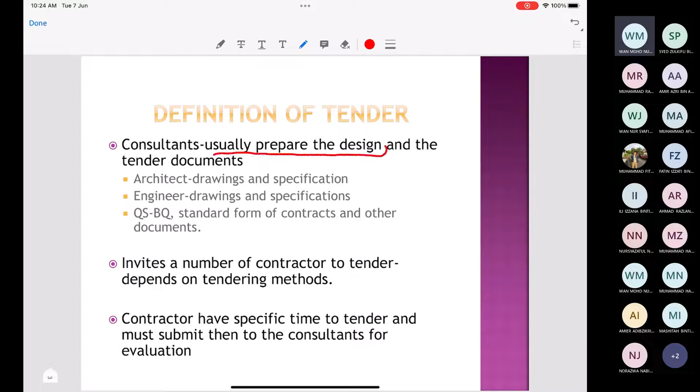So what else do we have here? Consultants usually prepare the design and the tender document. This is in the context of the traditional procurement system, where the design and also the tender document is prepared by the consultants.

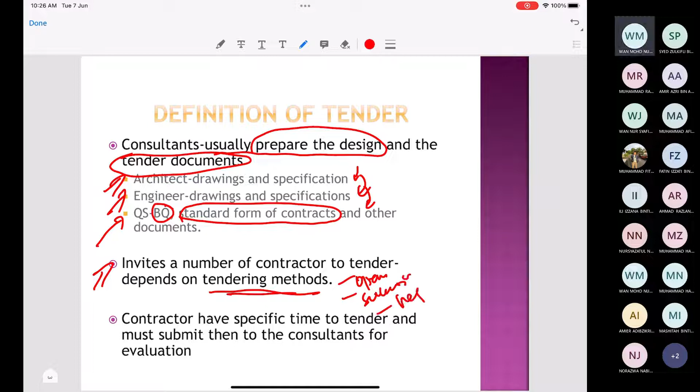If it's open tendering, it is open to public. It is open to any contractor that is interested to participate and can participate in the tender.

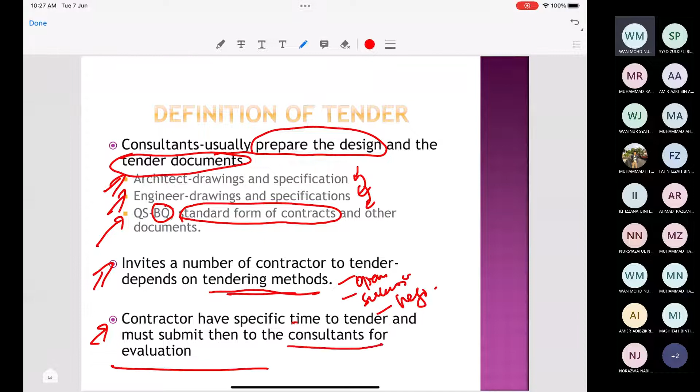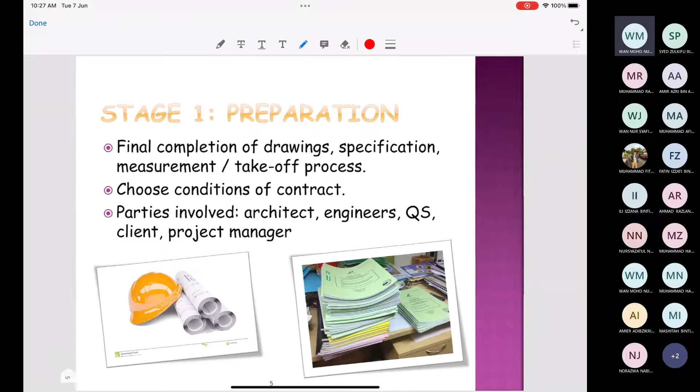I will discuss it here. So we have preparation, approval to tender, documentation, then it goes to invitation, processing, and award of the contract. Preparation is actually preparing the tender document.

Preparing tender document, we have the architect, engineers, QS, client, and project manager all come together.

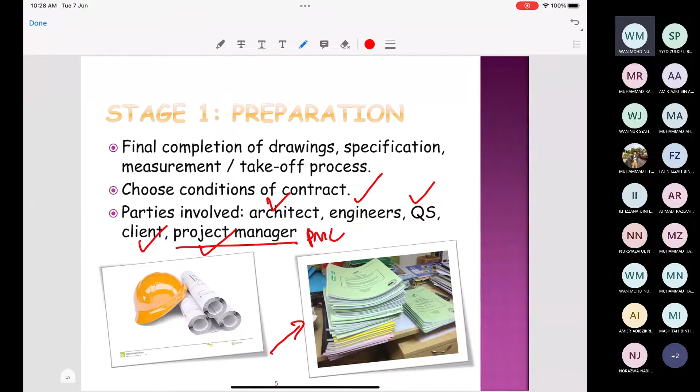So also choose the condition of contract. This is stage 1, preparation.

Stage 2 is approval to tender. So this is approval from whom? Who will give the approval?

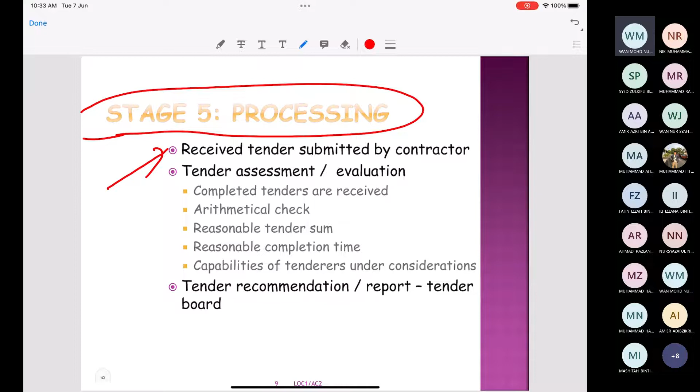Tender assessment, ataupun tender evaluation. After kita dapat tender document daripada contractor ataupun daripada tenderer, tender document tersebut akan melalui proses penilaian tender. Siapa yang akan buat proses penilaian tender adalah those consultant lah, lebih kepada QS kat sini. So apa kerja-kerja yang akan dibuat di sini, apa yang kita akan go through dalam tender document tersebut.

Kita akan tengok dari segi completed tender are received, maksudnya dari segi kecukupan, kesempurnaan tender. Kita akan check dari segi arithmetical check, maksudnya mathematical, whether the tender document ada banyak error ataupun tidak, mungkin silap dari segi timesing, squaring, dari segi calculation. Katakanlah ada terlampau banyak error, which means that this contractor are less capable of doing the job, kita cakap not that competent lah.

And reasonable tender sum - tender sum, it should be reasonable. Kalau projek tu around 50 million, it should be around that, mungkin 40 ataupun 60, jangan sampai 100. It should be reasonable. Reasonable completion time, in terms of dia punya construction period offered. Tempoh siap yang ditawarkan oleh kontraktor ataupun tender should be reasonable, munasabah.

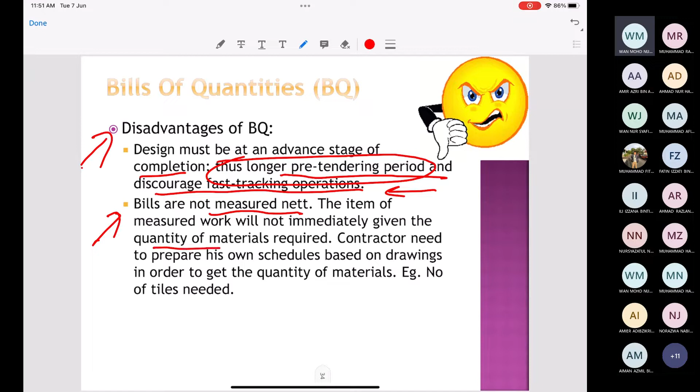The measurement is done according to the scope of work. The items of measured work will not immediately give the quantity of materials required. The contractor needs to prepare his own schedule based on drawings in order to get the quantity of materials.

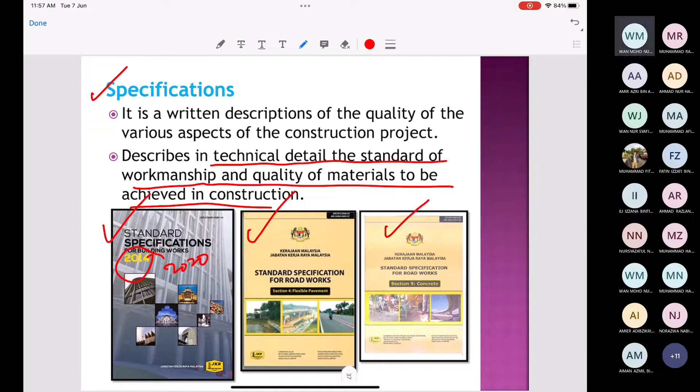Tapi katakanlah item tersebut tiada di dalam standard specification seperti ini, and that specification boleh kita dapatkan daripada manufacturer. So manufacturer punya specification boleh di-include di dalam specification dalam tender document tersebut.

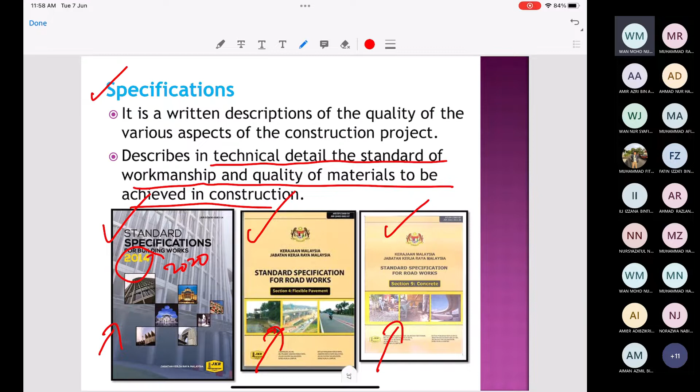Sebab dalam BQ, katakanlah BQ cakap tulis ceramic tiles, 'ceramic tiles or other equivalent spec' ataupun equivalent quality of the tiles. Maksudnya equivalent tu membenarkan kontraktor untuk propose tiles yang lain-lain, okay, yang bersamaan kualitinya.

Okay, saya nak terus ke preambles. Apa yang dimaksudkan preambles dalam ni? It's a preparatory document to explain the purpose and the function, underlying facts to inform contractor on what items is about and what needs to be included and considered during pricing. Semasa nak pricing tu, apa yang perlu dinyatakan dan dimasukkan sekali dalam pricing tersebut. Includes parties, supporting needs, objective and so on. And it is a non-price item, hanyalah on the explanation.

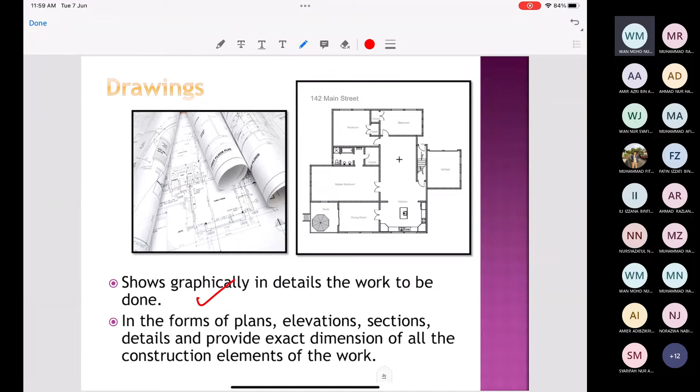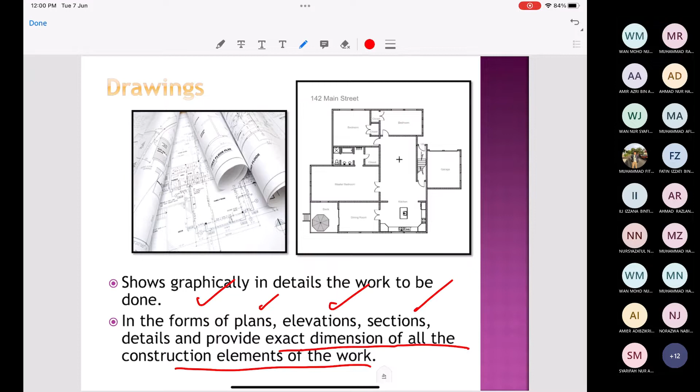Okay, boleh tengok preambles. Then we have drawings. Tahulah drawing ni apa? All of this shows graphically in detail the work to be done in the form of plans, elevation, section, detail, provide exact dimension of all construction elements of the work. Dengan adanya drawing ni, barulah kita boleh proceed dengan BQ. Tapi kalau BQ tak boleh nak di-produce, kita pakai drawing and spec punya contract. Drawing yang akan diberikan, dan kontraktor akan come out with the amount based on this drawing. So drawing kita ada architectural, civil dan M&E, if any.

Okay, saya terus ke ini. Sama kan, okay saya terus inilah.

PC sum, macam saya cerita tadi, adalah kerja-kerja yang akan dibuat oleh nominated, whether it is subcontractor ataupun supplier. PC sum is inserted as a lump sum figure in the BQ. Maksudnya harga PC sum itu telah di-type dalam BQ tersebut, tidak boleh diubah. Dia hanya akan berubah apabila lantikan nominated subcontractor itu nanti, itu cerita yang lain. Tapi dalam situasi bila kita buat tender document tersebut, harga PC sum biasanya harga yang tetap, yang tidak boleh diubah oleh main contractor ataupun kontraktor yang menender. Tapi dibenarkan untuk kontraktor, okay dia cerita kat sini.

PC sum are followed by items for profit and attendance, which contractor has to price at tender stage. Sedangkan kerja-kerja tersebut akan dibuat oleh nominated subcontractor, tapi main contractor dibenarkan untuk collect profit ke atas kerja nominated subcontractor tersebut dan juga attendance. Apa yang dimaksudkan attendance? Attendance adalah kerja-kerja ataupun sebarang provision of general facilities provided by the main contractor to the subcontractor. Subcontractor nak kerjakan kita, dia nak pakai air, dia nak pakai elektrik, takkan dia nak tarik elektrik sendiri. Dia akan menggunakan elektrik yang dibekalkan oleh main contractor. Jadi main contractor dibenarkan untuk menghargakan attendance di dalam PC sum.